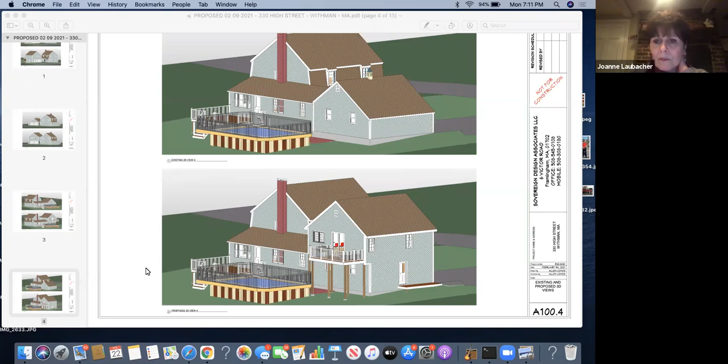I don't think that would matter to us particularly. Could you go back to the top, to the very first drawing? I think there's one more. So there's some other street, like front, further down, but does that matter? Okay, we'll get to that.

Let's see - what's the entrance into the unit from the house or from the breezeway? You see the breezeway here, the door right there. So you go into the garage and there's a stairway within the garage, inside the stairwell.

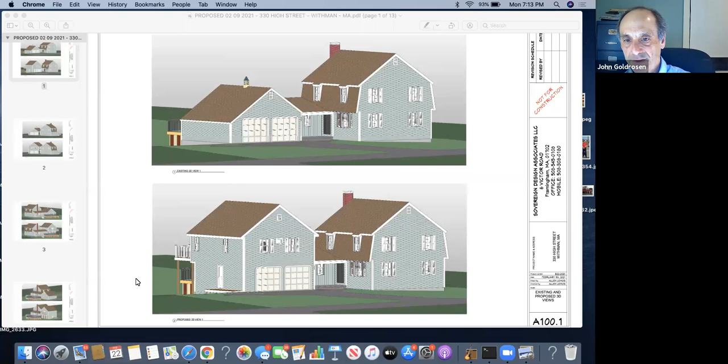I'm trying to figure out, besides the stairway to the unit from the left-hand side of the garage - well, there was supposed to be one in the back of the house. But what about one from the breezeway? There's one here, a door here and a door here, and there should be an exit here as well. So how many staircases to the unit? Just one, inside the garage? That's all I saw in the plan. I think it's further down.

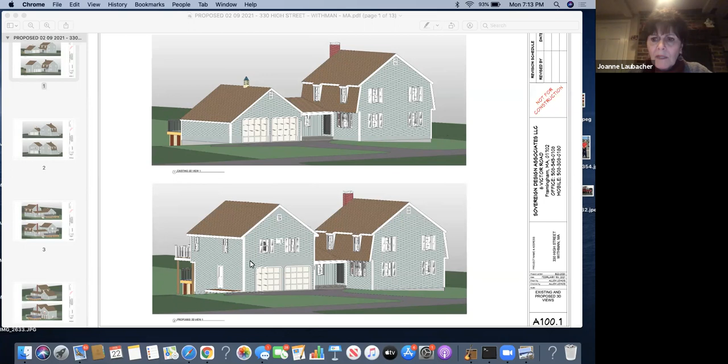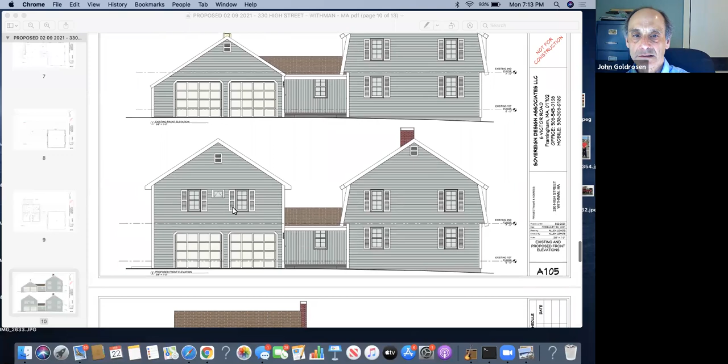And you said if you scroll down all the way, there's a view from the street? Why don't you show us that? I think I saw some of that down further. There's another one there. So that would be one there. Okay, and this is more how it looks from the street. Yeah, lots of views.

As we get to questions, I'll see if members of the board want to look at something particular.

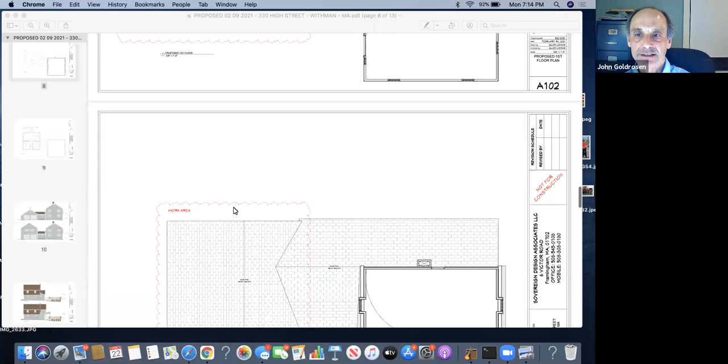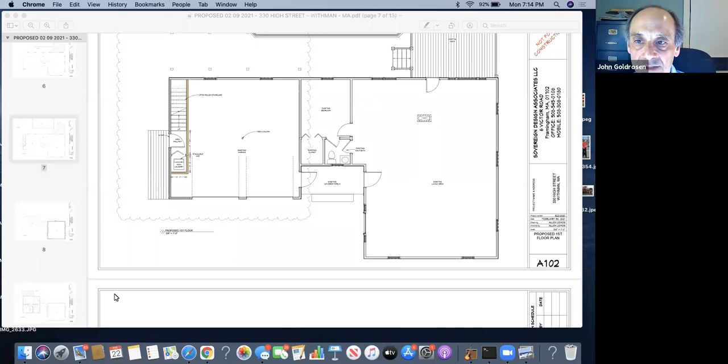Why don't you scroll up to the layout of the interior? Let's see, so which of these - looks like that first one there that you're showing now is probably the garage level. Just tell me, leave it, I'll scroll slowly, you can tell me when to stop. Why don't you stop right where you are, because this is the unit itself, I guess, or is this still the garage? Looks like it's still the garage. Okay, why don't you keep going - here's the second floor roof.

Here's the interior - okay, why don't you leave that one there, because people might have questions about that.

I actually have a question while I'm looking at it, because I told them just to do a one bedroom there. Without enlarging it, what are the - it looks like you just have one bedroom there and then sort of a living room, kitchen. Oh, it's two bedrooms, huh? Yeah, and I had mentioned to them that it should just be one, so I don't know.

A bedroom, it should be a bedroom and a bathroom, a kitchen area and a living room, like a sitting TV area. Let me just see if maybe there's something - no, there isn't. All right, we'll see if members have any issue with that. But it's just one bathroom, kitchen? It should be, yeah, I mean there doesn't need to be two bedrooms. And then that's the deck at the very top.

Let's go to members of the board for comments or questions. Mr. Keeman? The only comment I have is that the roof - the way it's shown, I'm fine with the way it looks. I don't think it needs to be a gambrel roof. I think the picture, with the way it shows in the picture, is fine.

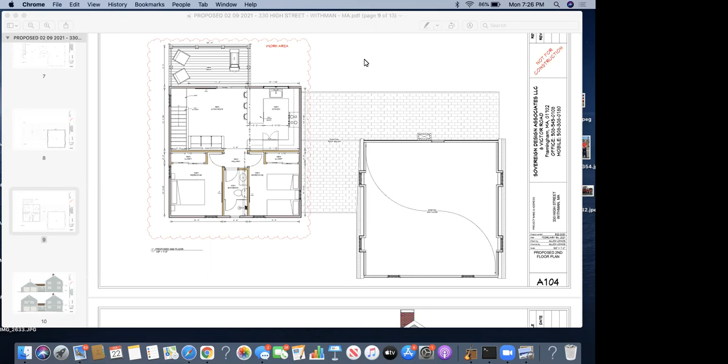Yeah, it looks like the existing unit doesn't have dimensions on the side there. I'm looking at the site plan. I think, Joanne, you're 8 or 10 feet. Is that what it is to your side property line? I don't have that information.

I think at the back corner, we were not going to extend that, and there's already an existing building. We're going up in space instead of side or back. So we'll make it closer to the front corner. We'll say that it needs a determination since it is going up - that's enough to require a determination, so determination is a special permit.

My comment is, as far as the design and the roof line, this is like what a lot of people have - a 'frog,' a family room over garage, where they put a whole second story over a garage, and that's essentially what this is doing. I also remember, Mr. Blas, that's what a lot of the discussion was about - the design of the roof - but I don't know, for myself, looking at this...

I'm trying to picture in my mind how different it would look, and I don't know, I don't have a problem with it being designed this way.

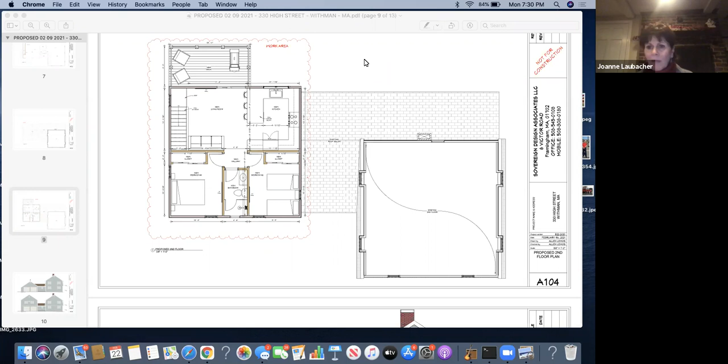So I think that addressed their issue. That may still get resolved between them, but it doesn't matter on this. So it doesn't seem like anybody in the neighborhood has any issue with the proposal itself or the design.

All right, if there's nothing further, I think we're ready to close the hearing and go into deliberations. So what we're being asked for is a special permit for the in-law, and since this is an increase in the nonconformity - to the extent that even though it's on the same footprint, it's going up a floor - the question is whether the addition is not significantly more detrimental to the neighborhood than the existing structure. So does anyone want to make a motion?

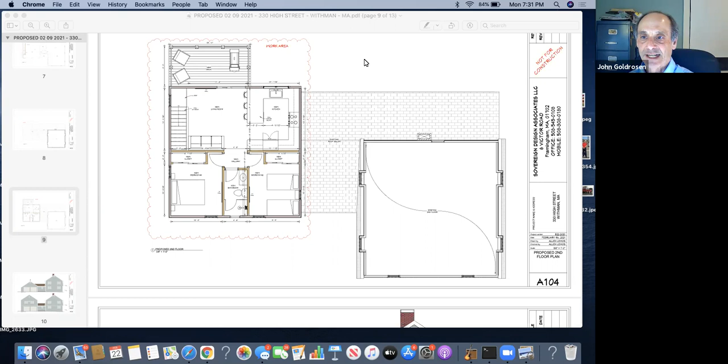I'll make a motion to move forward - motion to approve by Mr. Cacciatore for both the determination and the special permit. Is there a second? I'll second it. Mr. Keeman seconded, and I'll call a roll then. Mr. Cacciatore - yes. Mr. Keeman - yes.

Mr. Blas - point of order, Mr. Chairman, were there conditions, are there conditions that are part of this motion? We haven't stated any, I guess, as far as the interior staircase - that's something that I think would have to be altered for building code. Is there anything else?

I don't think so. You had a determination. Yes, there was the question of the second bedroom, but I think that's moot. It's kind of up to them, really, I think.

Okay, all right. So, Mr. Blas, your vote? Yes. Mr. Andrews? Yes. And myself, John Goldrosen, yes. So this is approved. Thanks for the time it's taken and the effort.

We're not going to meet again then? Yeah, we're done. You can contact Mr. Curran, it'll take us a week or two to get the decision out, and then there's an appeal period, but Mr. Curran can explain all that to you. You'll be all set to go.